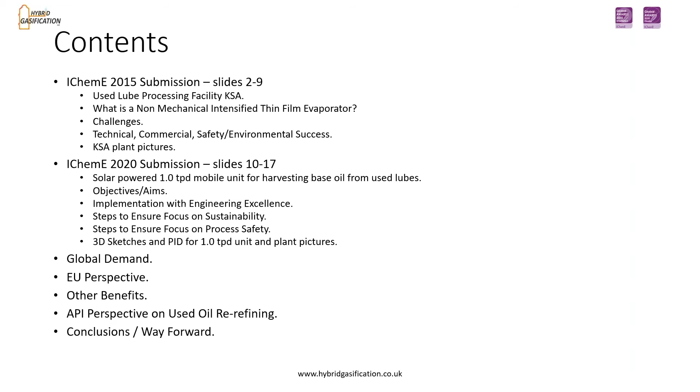I wasn't too sure, but my presentation consists of 9 slides, almost 8 slides on my previous submission in 2015, which was shortlisted. I will run through quickly just to put some perspective on where we went with the next stage of this 2020 submission, and I'm happy that it's also been shortlisted for presentation. And then I will go to some global demand for base oil, lube oil, and EU perspective on that, and in the end some conclusions.

The used lube oil processing facility, the first one, was built with a 100 ton per day capacity in Saudi Arabia to produce Group 1 heavy base oil. It was a vacuum distillation facility.

It actually used structured packing for separation of a consistent quality product. The interesting and novel part of that was that rather than using a conventional wiped thin film evaporator to treat the residue, a non-mechanical thin film device was fitted in the flash column, for which a patent has been filed.

I'll explain a little bit on what is a non-mechanical intensified thin film evaporator. It is a device fitted on the bottom of a flash column, and this helps to recover the remaining part of the base oil when the heated base oils enter into the flash column.

Amazingly, we were able to achieve more than 80% recovery without fitting the mechanical wiped thin film evaporator, the conventional approach normally used. We are all familiar, being process engineers working in the oil and gas sector, that the problems with mechanical thin film evaporators are always mechanical seal problems.

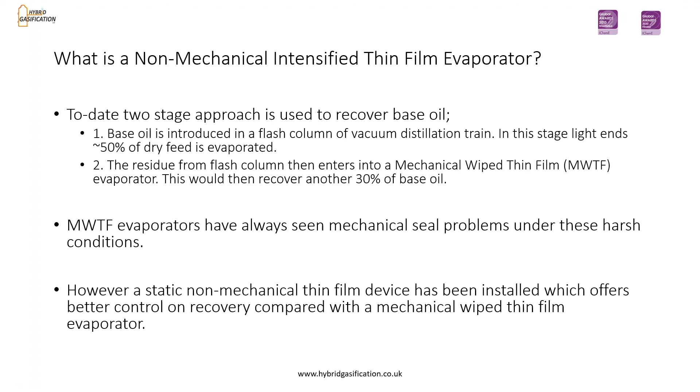The challenge was when this was proposed by me that this was a very inexpensive and practical solution, so the client wasn't ready to go for this unproven but very inexpensive, practical solution.

So we had to do some testing to convince the designer of the plant. In order to convince the designer, we ran a cold testing to establish the optimum flow rate for a consistent quality of thin film.

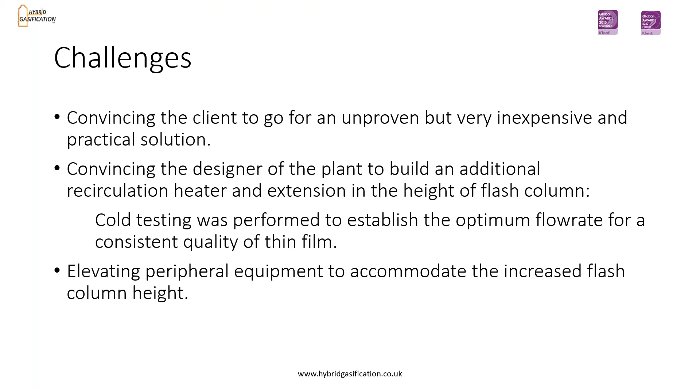For that, we needed to increase the length of the flash column, and in order to do that, we had to elevate the peripheral equipment to accommodate the increased flash column height. So after a few iterative discussions with the client, we got the go ahead, and we installed it.

In fact, it eliminated that problem. It performed very well, better than the thin film evaporator, with no downtime or shutdowns seen, which are typical with the wiped thin film evaporator. We saved on the additional vessel, pipework fitting, and all that. We saved on plant downtime, and therefore we built the plant much cheaper than without this additional system, which includes the wiped thin film evaporator.

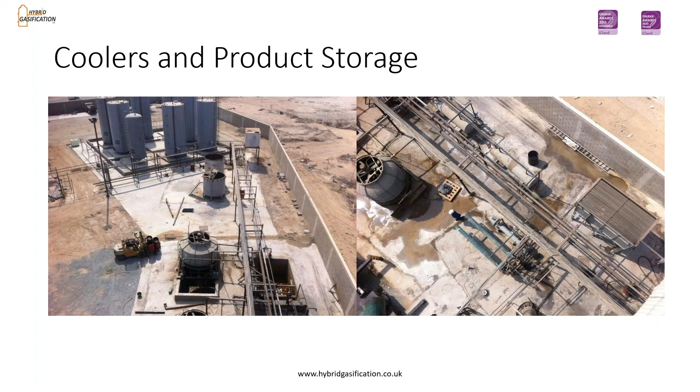You can see the residue here, as the spent lube oil is converted into heavy base oil and light base oil.

Now I come to my current submission, which is a 1 ton per day mobile unit for the recovery of base oil from used lube. The idea was that one could run it with solar powered energy, maybe for 6 to 8 hours, unless you want to run it for 24 hours, depending on the economics where it's installed.

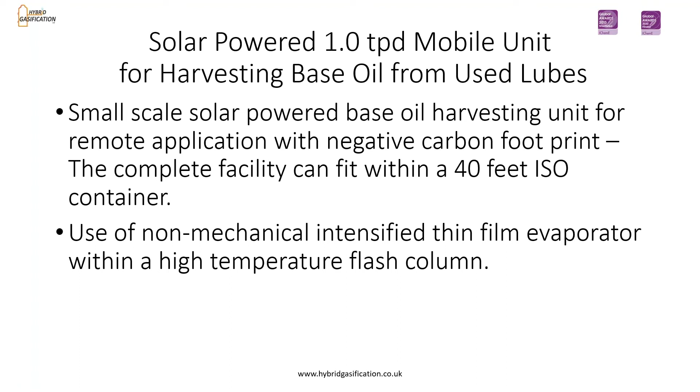It also has this non-mechanical intensified thin film evaporator fitted in it. Some of the objectives here were to improve the recovery and quality of product by avoiding adulteration from different types of oils when taken to the centralized facility.

Improved environmental benefit by avoiding the use of fossil derived energy, and last but not least, improved environmental benefit by avoiding unnecessary transportation to and from the centralized facility.

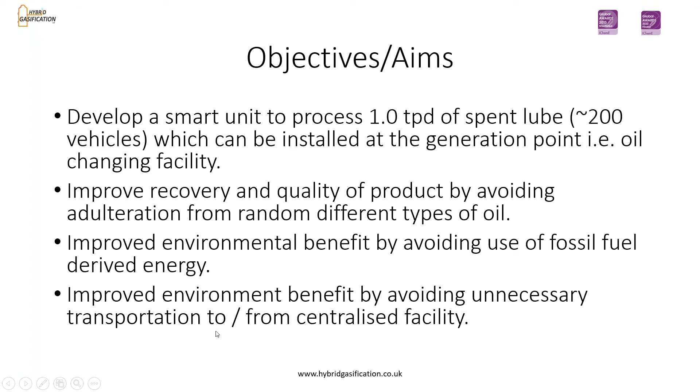There were a few challenges in building a small unit. One was downscaling from a 100 tons per day plant to 1 ton per day, and you can imagine the process engineers faced a lot of process engineering challenges. The recovery we could achieve was 85%.

Heating requirement was met by an electrical coil immersed in thermal oil. Use of solar power electricity offers an enhanced negative carbon footprint.

That also gave the benefit of sustainability, such as on-site recycling of base oil offering much lower cost than transporting to a centralized facility, helping with not-in-my-backyard community demands, and improved income for the local community.

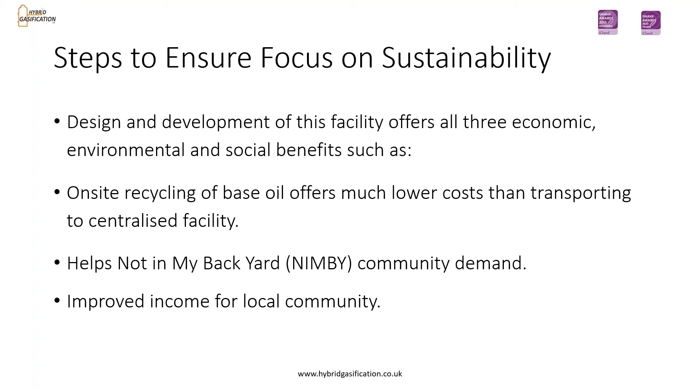Process safety wise, there were a few things we needed to look into. The process plant operates at full vacuum and all columns had pressure relief valves installed. All control valves were positioned ergonomically for safe operation. The thermal oil circuit was installed with a flame arrestor in case released fumes catch fire.

Exhaust gases post vacuum pump are released via a water seal to an enclosed flare system maintained at 850 centigrade. Here are some sketches, a 3D sketch of that small facility, 1 ton per day, with P&ID.

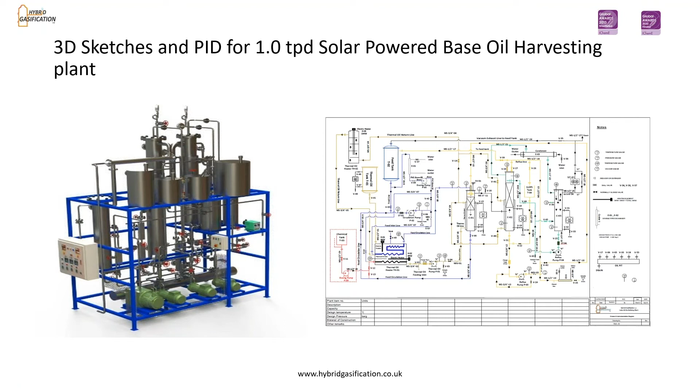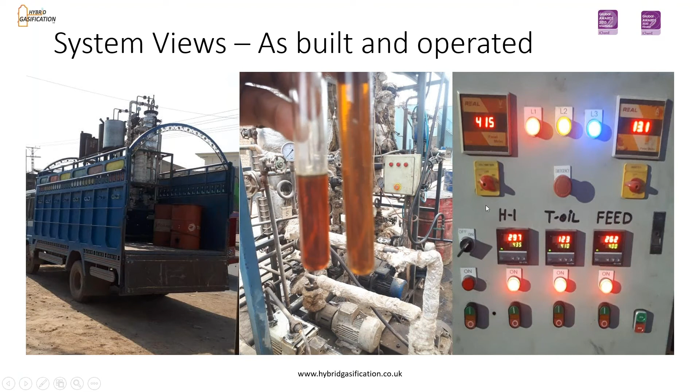In the middle of the picture, in the background, you can see the same demo facility in operation with base oil recovered, pictures of it in the tubes, and a control panel shown on the right side.

In summary, a 1 ton per day compact unit has been installed, achieving 85% recovery. Benefits of on-site recycling of base oil will result, and the complete processing unit easily fits in the space of a 40-foot container.

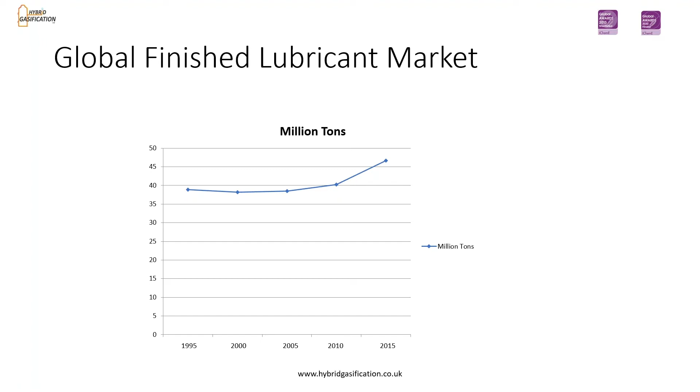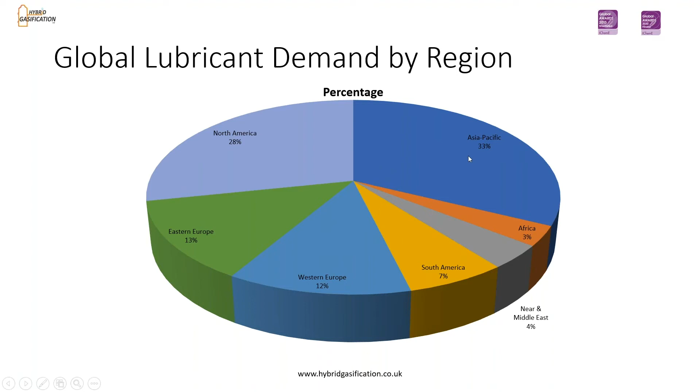For those who want a feel of the finished lubricant markets, it's of the order of 40 to 50 million tons per annum globally. Global demand, almost Europe, America and Asia Pacific, all share an equal percentage of demand.

Pakistan and India have almost a 1.7 million tons market. Globally, the review market by sector shows almost 50% in the commercial and consumer sector, which can be tapped into if this process is taken forward.

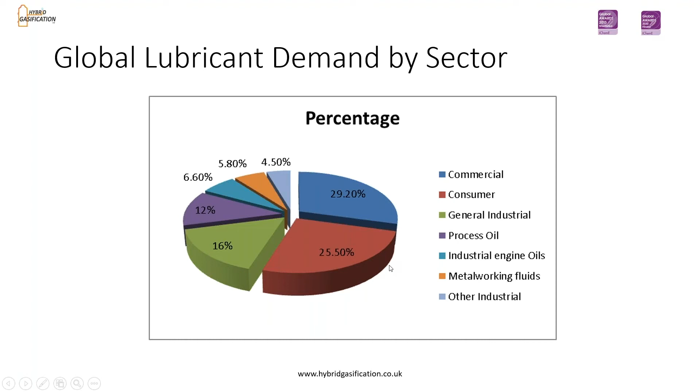There's an EU perspective I've added in my presentation. Out of 6 million tons sold annually, only 2 million tons are collected, and almost 1 million tons are re-refined.

Plants using hydrogenation or solvent extraction produce virgin quality oil, and a report by Fehrenbach confirms that recycling uses less energy than oil virgin produced from crude oil.

So an EU framework directive insists on preference for re-refining over fuel use. So we should really stop using it as a fuel, and used oil should be collected separately.

Benefits to the oil refining sector for this particular technology: re-refining offers an overall negative, good carbon footprint compared with oil produced from the crude oil route.

It keeps lube oil in productive use and delivers improved oil security. Non-mechanical thin film evaporation can be applied in several other areas of refining.

Immediate application is for recycling base oil in poorer countries where there is no need for group 2 oils, where the old cars are there and all that. But a hydrogenation stage can be added to obtain group 2 base oil. Potential use to clean scrubber effluent contaminants, and also on the biodiesel plant for methanol recovery. There are several more applications for this non-mechanical thin film evaporator within the petrochemical sector and refining sector.

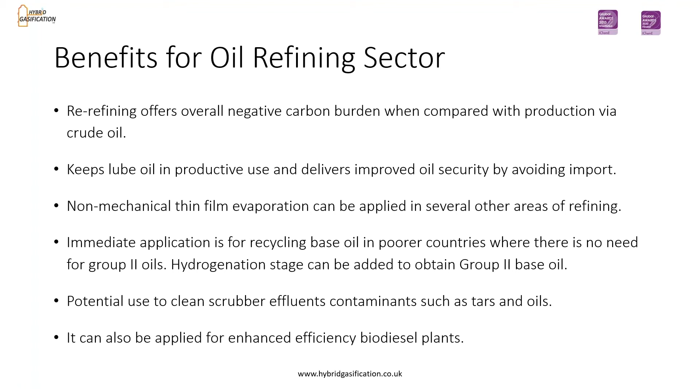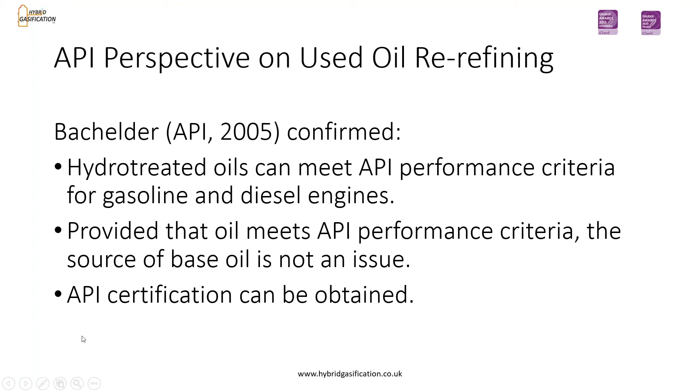I can go on, guys. There's an API perspective on used oil re-refining. I've got a couple of slides left where Bachelder confirmed that hydrotreated oils can meet API performance, provided that the oil meets API performance criteria. The source of base oil is not an issue, and one could get API certification for this type of plant.

My last slide is just: employing the 1 ton per day solar base oil recycling system has many economical and environmental benefits. The application of non-mechanical intensified thin film evaporation device is a leap forward in the reduction of processing costs and will replace conventional expensive evaporation technologies currently in use. So this was it for me today.

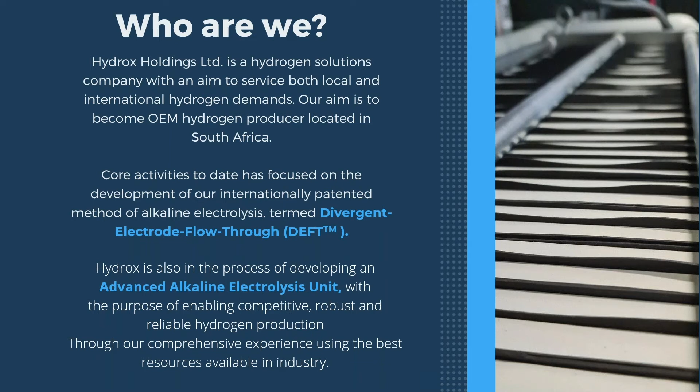In terms of our core research and development, our technology we've coined the term DEFT. It stands for Divergent Electrode Flow Through, and I'll give you a breakdown later on in my presentation of what that technology encompasses. Likewise, here locally in South Africa, in terms of positioning ourselves as a commercial fabricator, we've gotten considerable interest locally as an OEM solutions provider for hydrogen, and hence we are concurrently working on our advanced alkaline electrolysis technology as well. So that's a brief introduction of the two technologies that we are championing.

So what is the challenge when it comes to electrolytic hydrogen? Currently, around 95% of hydrogen produced globally is from fossil fuel sources, for example, steam methane reforming. A small amount, 5%, is produced from electrolytic hydrogen, and an even smaller percentage of that is green hydrogen. So what is the need for electrolysis to become successful?

In order for that to happen, electrolytic hydrogen needs to become more accessible and, more importantly, more affordable. And for that, you need electrolyzers to become inexpensive, reliable, compact, and to some extent have operational flexibility. Taking all this into consideration will do wonders for the CapEx and OpEx of these systems, as well as for their overall efficiency and reliability. Those are the core issues we're trying to tackle as a small organization. Moving on to the next slide. There we are. So what are the current challenges in industry?

So what you'd find is within industry, where you find efficient electrolyzers, they often do come in at quite a high capex and opex. So the operational costs aren't exactly reliable. So they do struggle to compete with the current fossil fuel sources of hydrogen available globally.

In terms of operational flexibility, there's this need to continue to design electrolyzers to be more coherent with being linked to renewable energy sources such as your solar and your wind. And currently, number 3 over there, one of the drawbacks with a lot of hydrogen systems is the complexity that's involved. And obviously, we have more components and more complex components.

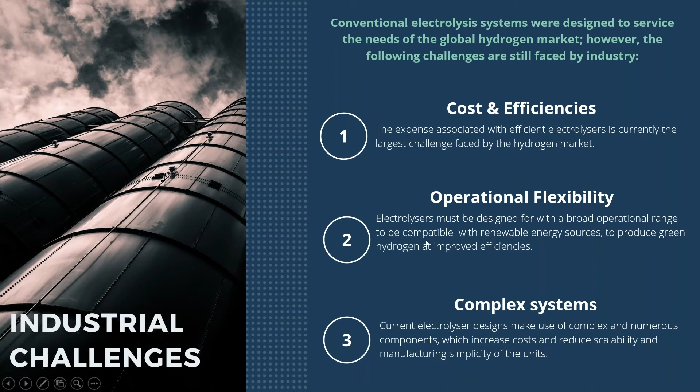So what do we have as Hydrox to bring to the table? So like I've mentioned, our core development is the divergent electrode flow through principle. And what's unique about it is it does not utilize a conventional membrane or diaphragm to achieve separation of the produced hydrogen and oxygen gases. So quite simply, we believe that the absence of the membrane will allow for operational flexibility as well as the improvement in the high capex costs associated with currently available conventional electrolyzers.

And in terms of our advanced alkaline electrolysis system that we're currently developing, it makes use of industry's best components, such as membrane separator components from AGFA, as well as electrodes sourced from De Nora. And the whole idea about that is to simplify and streamline the electrolyzer design while achieving a high efficiency. And again, the whole idea is for us to incorporate this technology as an OEM manufacturer here locally in South Africa. Moving on to the next slide.

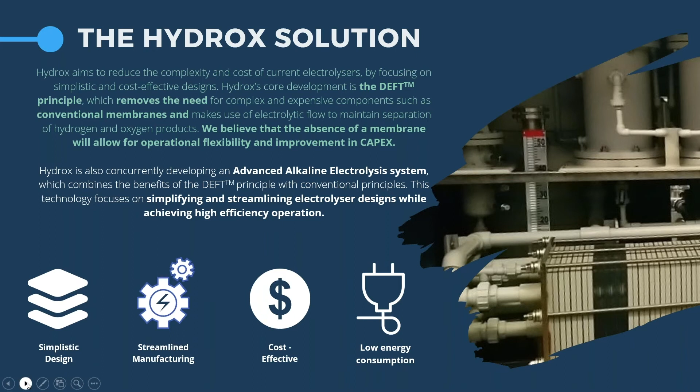All right. So just a bit of a breakdown in terms of what distinguishes the technologies. So our core technology, which is DEFT, as I've mentioned, doesn't make use of any kind of membrane to separate the oxygen and produced hydrogen gases. It solely relies on the flow of electrolytic solution through porous structures in order to maintain the gaseous separation. So as a result, there's a small electrode gap that's present inside the electrolyzer itself, but there is no conventional membrane or diaphragm.

And flow introduced into a cell provides you the unique advantage that you do not have to, to such an extent, concern yourself with too much ohmic resistance formed by the gas bubbles on the electrode surface, because they're actively removed from the cell all the time. So you have that benefit in terms of being able to now achieve very high current densities and not being limited by the current density threshold that you would normally have with an alkaline technology. And the whole idea with DEFT is to enable us to push the boundaries of current conventional electrolyzers. And on the next slide, I'll illustrate to what extent the technology can go about achieving that.

In regards to our advanced alkaline electrolysis technology, it's an advanced technology that aims to use a zero gap type operating principle, but the whole idea is we want to develop a reputable advanced electrolyzer that can be commercialized here locally, and that would be our current short-term route to achieving commercialization.

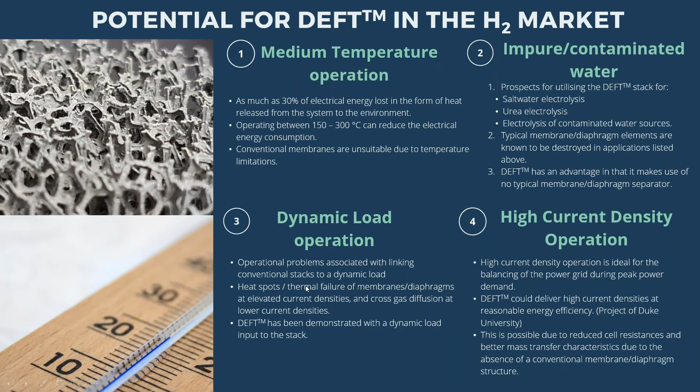Over time, we've done a number of concept demonstrations to go about developing our unique technology DEFT, and we've done this on a number of stack prototypes over time. And we've worked on this technology for the past 8 years, and it is currently ready to extend itself to potentials not recently realized by conventional electrolysis technologies. And this is really what we would like to explore in a number of partnerships that we're looking at the moment.

But just to summarize where we are with the technology, just waiting for the slides to catch up. I think it's caught up.

So on the left-hand side, we've recently done a demonstration of our technology for Shell, the Game Changer program located up in the Netherlands. The whole idea was to demonstrate our DEFT technology by producing a unit that can do 2.5 cubic meters of hydrogen per hour. So it roughly equates to a sizable demonstration stack in the range of 15 kilowatts, and that operates off our DEFT principle.

And as I've mentioned, concurrently, we're developing our advanced alkaline electrolysis technology, which utilizes a lot of the core elements that we've incorporated in our DEFT technology, alongside the AAE and utilizing the core elements. We're utilizing our own unique experience in order to design a very competitive unit here. Moving on to the next slide.

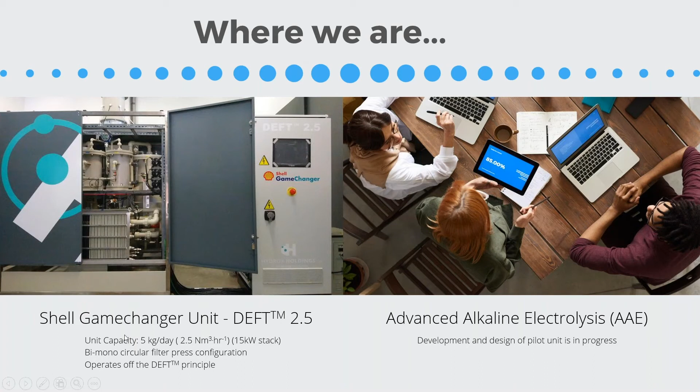So just to go briefly over what our Game Changer program was about. We were commissioned in June 2018 to undertake a project to do a demonstration. The project was subdivided into 3 phases. The technology had some challenges associated with it, which we had to overcome in phase 1, which graduated us over to phase 2, which was the engineering.

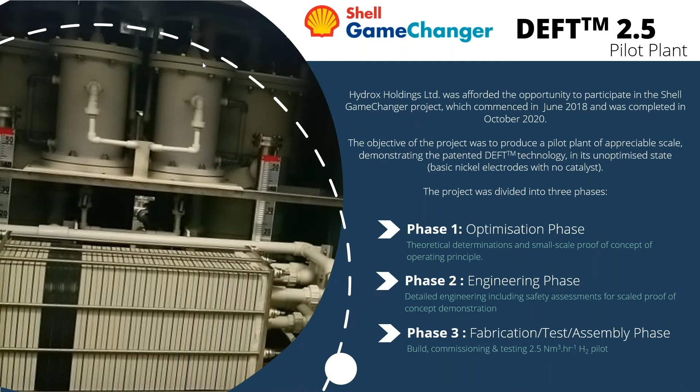So various different safety checks, HAZOP analysis in order to produce not only the stack itself, but the complete balance of plant, which we designed internally within Hydrox in order to facilitate a unique balance of plant to operate such a unique cell. And phase 3 was the phase where we went about fabricating, testing, and commissioning the unit. So that was our Shell Game Changer, and from Shell Game Changer there came a number of outcomes.

So the technology is still very much in a rudimentary form. There's still a lot of optimization that we can do since it is largely uncatalyzed at the moment, but it shows good potential in terms of getting to very reasonable efficiencies. With our Shell Game Changer project, we managed to demonstrate an efficiency range of roughly 64 to 68 kilowatt hours per kilogram of hydrogen. So on a high heating value, that translates into a percentage range of around 62 to about 58.

And we demonstrated the stack within a voltage range of 1.8 to 2.4 volts. A little bit higher than conventional alkaline electrolysis technology, but we aim to bring it into the region of 1.7 to 2 volts in the near future.

And regarding the combined capex and opex costs with an assumed electrical production cost of $0.07 per kilowatt hour, we calculated the end cost to produce hydrogen from our system at atmospheric pressure to be in the region of about $8.44 to $6.95 per kilogram, depending on where in the voltage range you operate. So we feel there's still significant potential to improve that cost range.

And in terms of gas purities, we had to achieve anything in the region of 99.5 volume percent and higher, which is great because we managed to achieve that with a membraneless principle, and we've demonstrated good gas purities, very similar to what you get from a conventional alkaline electrolyzer. And in terms of scale up, previously we started very small, but with our Game Changer unit, we're able to provide a demonstration in the region of 320 millimeters in size.

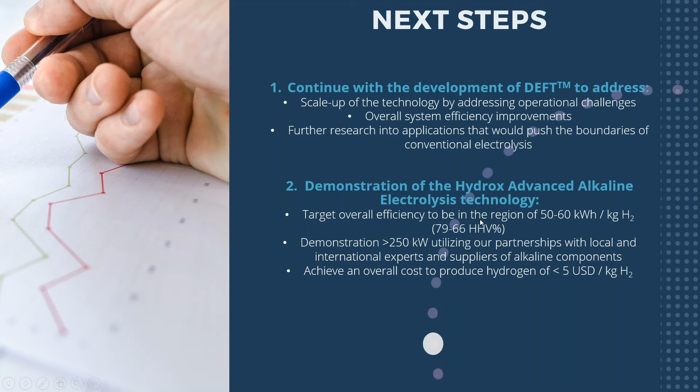And the goals that we have over there for the technology, we feel are very achievable. So we would like to get efficiencies into the region of 79 to 66% on the high heating value. And we'd like to do a demonstration roughly in the region of about 250 kilowatts. And inevitably, we would like to prove and show that we can bring the cost to produce hydrogen below $5 per kilogram. So that pretty much concludes my presentation.

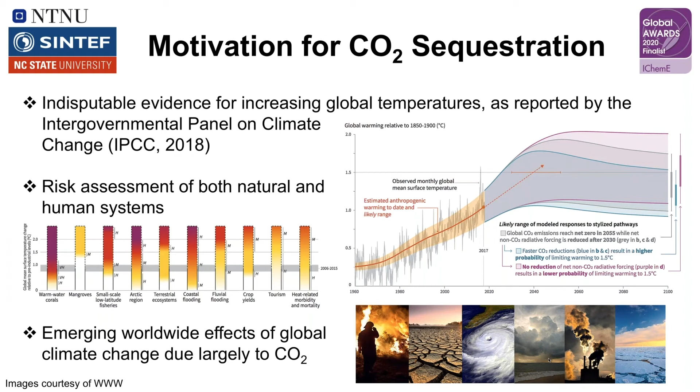What are the approaches? There are a variety of different ways in which one can remove CO2 from mixed gases. One of the most common ones involves CO2-philic solvents. And these can be aqueous or non-aqueous amines, but they rely on one important characteristic, and that is high CO2 solubility. Unfortunately, these types of liquids can also be toxic, corrosive, etc.

Then we could talk about inorganic membranes, where we deal with designing materials that are typically nanoporous, and we work with size selectivity and adsorption. Problems, of course, they're fragile. They can be tailored, but they tend to be expensive. Organic membranes, well, they can be size selective or solubility selective, and they tend to be much more mechanically robust. They're tunable in terms of properties, and most importantly, they're scalable.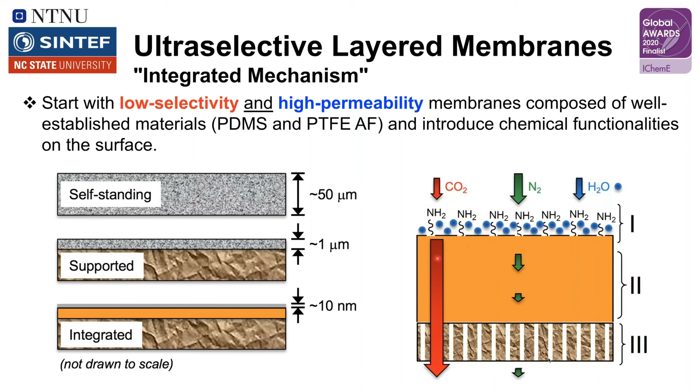This coating is only about 10 nanometers thick. Along the surface, we have species that are highly hydrophilic and highly CO2-philic—amines, which I mentioned earlier, are perfectly suited for this. Water stays within this range and allows us to take CO2 at one concentration and build it up, so when it goes through the high permeability zone, it's much more concentrated, and this is what we remove.

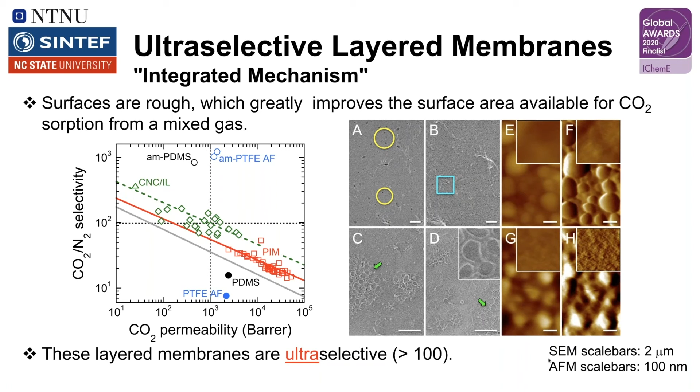I included this graph at the end to show once again where our ultra-selective membranes are located. We actually get into the Goldilocks range, where we have high permeability and high selectivity. On that note, thank you very much for your attention.

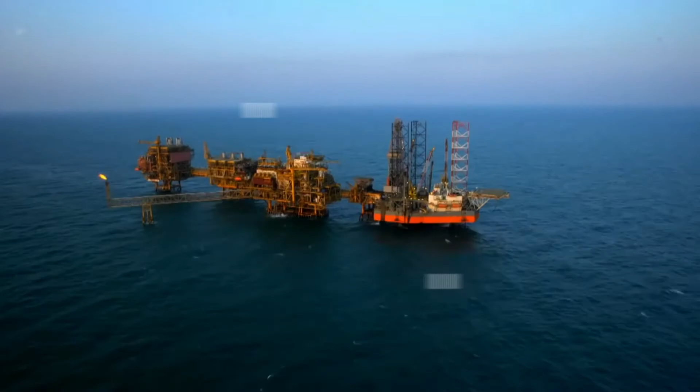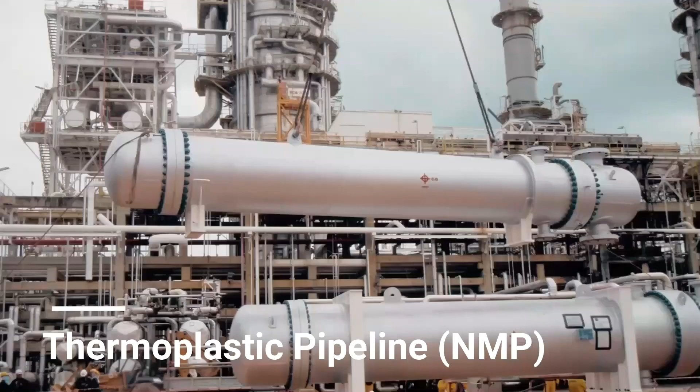Even though self-healing technology has been developed for many years, commercialization still remains a challenge due to the expensive catalyst. Our breakthrough innovation replaces rare earth-based materials with metal organic frameworks, which are more sustainable and economical, allowing upscaling and commercialization. The partnership between Petronas, Deakin University and University of Adelaide proves successful collaboration between industry and academics to take this technology further.

We all know that infrastructure in the oil and gas industry is very costly to maintain and keep safe for workers. We believe there's an opportunity to use self-healing materials to extend service life, lower maintenance costs, while enhancing user safety.

The technology we've developed with Petronas and the University of Adelaide addresses the long-standing problem of latency in self-healing materials. Using traditional microencapsulation techniques and a new application for metal organic frameworks, we've greatly increased latency and durability while achieving high levels of healing by eliminating surface defects, maintaining the integrity of the coating and preventing corrosion.

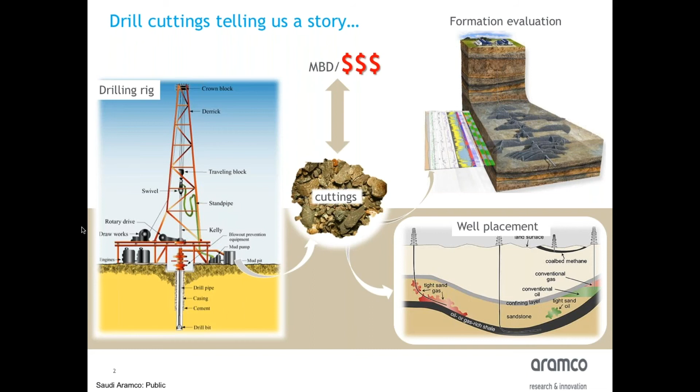However, the key challenge to maximize the value of cuttings for real-time formation evaluation is the accurate determination of the cutting's depth. Unfortunately, mud logging deployment has historically suffered from limited application due to uncertainties in drill cutting depth determination that can reach plus minus 15 feet, as you can see.

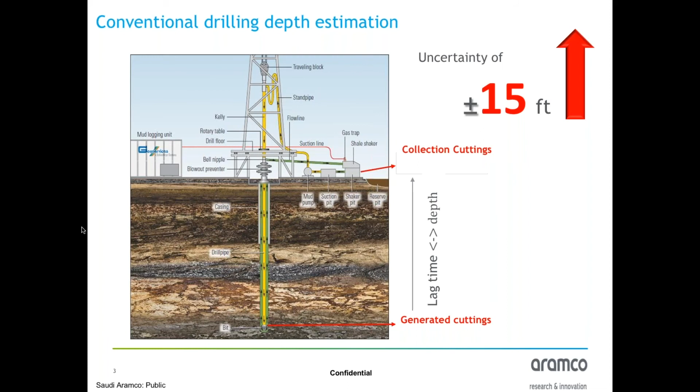This is already huge, and this uncertainty can be caused by many factors such as hole caving, hydraulics, gravitational debris accumulations, and many other reasons. Of course, these huge uncertainties lead to a lack of proper reservoir characterization and formation evaluation.

As chemical engineers working for an oil and gas company, we developed a technology called nanotags. This nanotag technology works to tag the drilling cuttings precisely as they are made at the drill bit face.

They are generated at the drill bit with barcoded nanotags that are injected into the drilling fluid. These nanotags are injected in certain sequences and concentrations with the drilling fluids and travel to label the drill cuttings. The labeled drill cuttings are then collected from the shale shaker, as you see here.

This technology can reduce the uncertainty to plus minus 1 foot. The generated cuttings will be permanently labeled based on their depth of origin without affecting any of their properties.

The synthesis of the nanoparticles via low surfactant loading or surfactant-free emulsion polymerization is very simple, scalable, and cheap, both in a small batch as well as in the large scale state-of-the-art flow reactor.

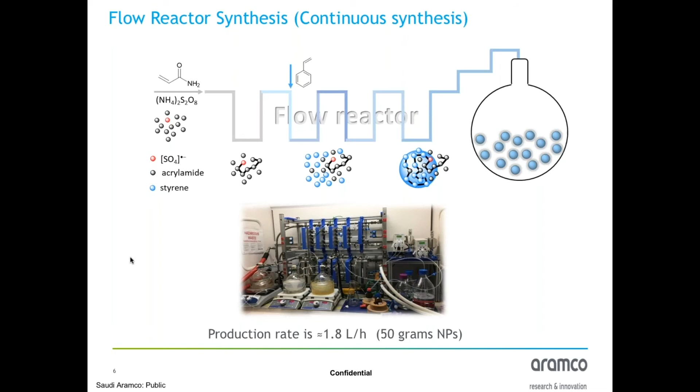The innovative nanotags are designed to be compatible with water-based drilling fluid via addition of hydrophilic comonomers or ionic surfactant. This compatibility can be further adjusted via reverse emulsion for use in oil-based drilling fluid as well. Worth mentioning, the hybrid nanotag synthesis process uses very safe microreactors, and the whole process was optimized for safe operation.

We designed a unique drilling depth correlation system consisting of the nanotags that you see in the containers here, and the automated injection system, as well as the detection and separation workflow.

The nanotags are transported to the field in low concentration aqueous suspension, only about 1% concentration, so very diluted, and used at ppm concentration. Here we are talking only about 5 and 10 ppm concentration of this material introduced to the huge mud tanks at the rig site.

The injection system will add the nanotags at certain pulses and concentrations before the low pressure point in the mud line, and operates under explosion-proof conditions to prevent any interruption to the drilling operation.

So we can do this kind of tagging for the drilling depth precisely without interrupting the drillers or the drilling operation. The cuttings were tagged as they were drilled at the drill bit and then collected off the shale shaker. After that, the collected cuttings are exposed to a solvent extraction and thermal separation workflow to extract the nanotags from the cuttings in the lab for estimation of arrival times.

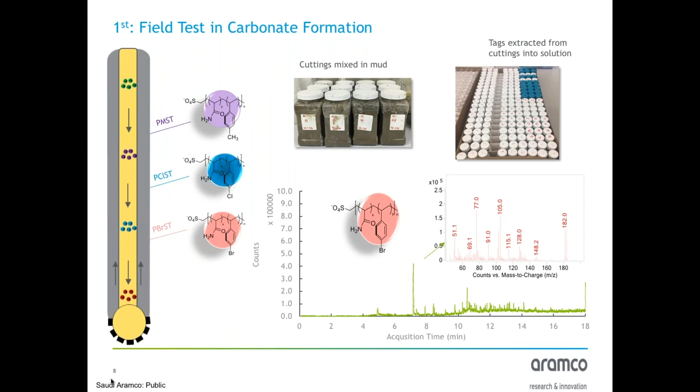To sum up, barcodable polymeric nanoparticles designed as tags for drill cuttings were synthesized and tested in the lab. A drilling field test confirmed the compatibility of the nanotags to determine the exact depth of origin of the drill cuttings in real time. And the impact of this is that the nanotags approach has potential to be a game changer in the oil industry, allowing accurate and precise cutting depth determination for real-time characterization from the cuttings. Analysis of the drill cuttings allows us to measure the properties of the underground rocks and evaluate the fluid content, and to improve reservoir management practices.

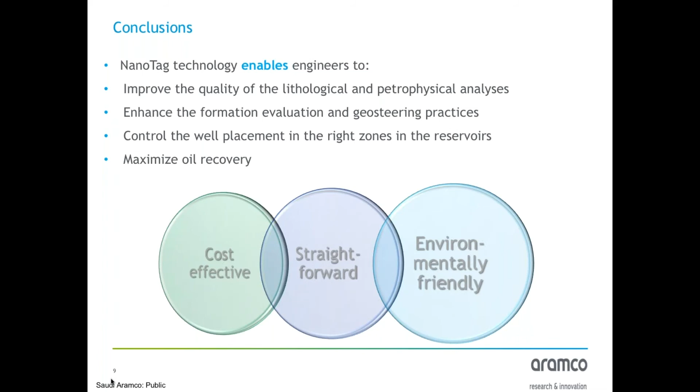Our first question is, can you please elaborate on the process you use to adjust the nanoparticles when drilling in water? And when in an oil environment, what is the best favored environment for maximum production? I'm sorry, would you please elaborate which process you mean, like the injection process or the detection process or the overall process? The question reads, can you elaborate on the process you use to adjust the nanoparticles when drilling in water? That's the first part. And then the second part, when in an oil environment, what is the best favored environment for maximum production?

So this technology has been developed for drilling oil wells, not water wells. So oil and gas, basically hydrocarbon wells. And we tested them in one of the gas wells as well. So I'm not quite sure if that will be relevant to drilling a water well. But what is important for this technology is that when you drill in a reservoir, regardless if it's oil or gas, it will be really important to know from which depth the drill cuttings came.

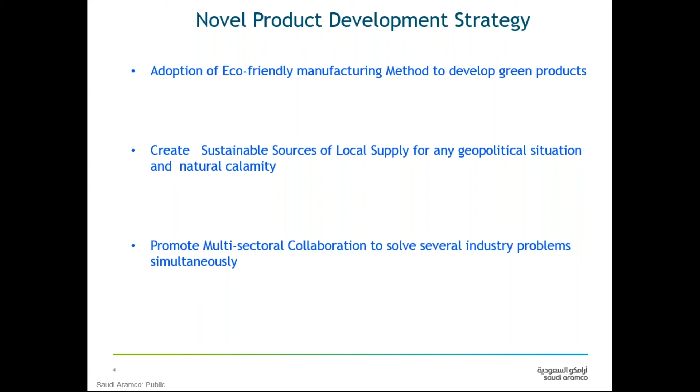And it will create a sustainable source of supply for the kingdom, so that in any geopolitical situation or natural calamity, as for example now due to COVID, we are unable to import lots of these materials. Now, if we develop it locally, we'll be able to avoid this type of problem in future.

First, I will talk about the date palm industry waste that we used to develop a couple of products. These are called conventional LCM products, loss circulation materials. As you can see, from a date tree there are various components. We used all the components of waste date trees to develop three major products that have been used by the industry for the last 100 years. And we have been importing these products since the start of oil and gas exploration. Now, we developed these products locally using this waste material.

First, we used the date seed. That is, after eating the date fruits, the seed comes as a waste material. In this country, we generate a huge amount of date seeds, more than 250,000 tons per year, and nobody knows what to do with it. So our objective was to solve the disposal problem of the date palm industry and create a value-added product for the oil and gas industry. And that's why using the date seed, we developed a product that we call ARC Plug. It is a particulate loss circulation material.

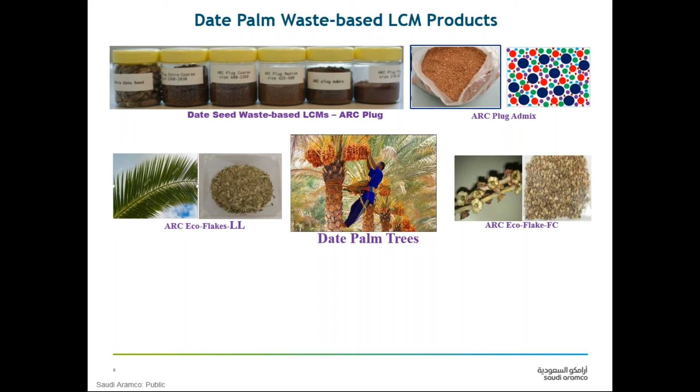Then, secondly, we used the leaflets and the fruit caps coming from the date fruits after eating them, the leaflets coming as pruning waste. We used this material to develop another product for controlling loss of circulation while drilling, called flaky LCM, flake type LCM. So particulate, flaky, and fibrous: these three loss circulation materials are the major ones used by the industry since the start of exploration and exploitation of oil and gas resources.

Finally, we used the diseased date trees, the roots, trunk, everything of the diseased date trees, to develop a fibrous loss circulation material. We call it Eco Fiber because it is natural, it is organic, it has no detrimental impact on the surrounding environment. That's why all these three products are eco-friendly products. So there will be no environmental impact if we use them onshore, offshore, in lagoon areas, in lake areas, whatever.

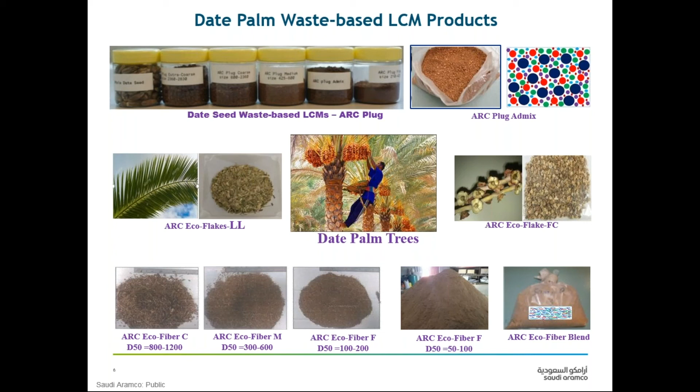Now, the three products we have developed: one is ARC Plug. This is particulate lost circulation material. Another is ARC Eco Fiber. This is fiber lost circulation material. Another is ARC Eco Flakes. This is flaky lost circulation material.

As I told before, these three major classes of lost circulation material have been used by the industry since the start of oil and gas exploration, we are using them now, and probably will be using them until the oil is finished. So this ARC Plug, all commercially available products currently in the market can be replaced by using our ARC Plug, which we developed using date seed.

This ARC Eco Fiber can replace all fibrous products available in the market and marketed by various companies under different trade names. And the ARC Eco Flakes can be used to replace all flaky LCM currently in the market. The two products, ARC Plug and ARC Eco Fiber, are already commercialized by Aramco, and are now used by Aramco, and we stopped importing the products that we imported before.

The ARC Eco Flakes is in the pipeline; we are trying to form a spin-off company or find a partner for commercialization and business development. The second product we have developed using waste scrap tires. There are lots of scrap tires available in the Kingdom, scattered in the desert areas and everywhere, and nobody knows what to do. So we tried to develop a product using this material.

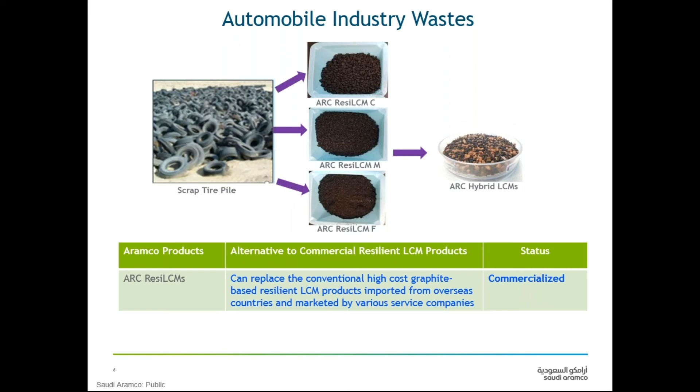The final products that we developed are some eco-friendly lubricants. As you know, most of the lubricants currently used in the industry are diesel or mineral oil based or their derivatives. And these are not good for the environment. They can cause damage to the offshore, onshore, or marsh and lagoon areas, and kill other resources. So when we explore and exploit oil and gas resources, if we damage other resources, that is not good.

And nowadays, different local, federal, and state governments are increasingly enacting environmental rules and regulations, and we are restricted from using mineral oil based or diesel oil based products. So we need eco-friendly alternatives. So using waste vegetable oil, we have developed some eco-friendly lubricants and emulsifiers.

Now, why do we use waste vegetable oil? Because this is a waste product. There is no other use for it in the food and catering industry. But if we use fresh vegetable oil, we will be taking a big chunk of the oil from the consumer market, and that may have a negative impact on the consumer market.

That's why we switched to waste vegetable oil, which will solve the disposal problem of the food and catering industry, and will solve our problem: the non-eco-friendly mineral or diesel oil based lubricants we can replace by developing eco-friendly lubricants using waste vegetable oil.

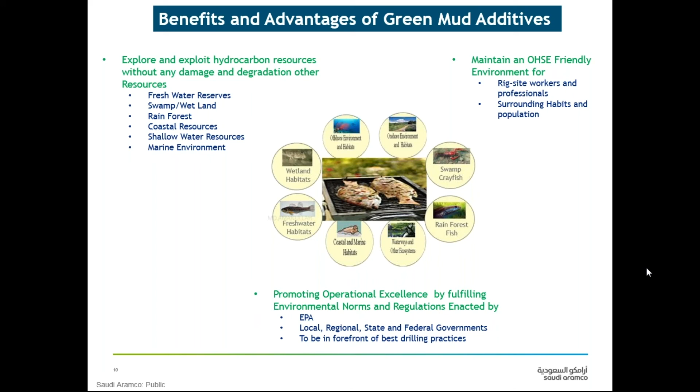Another is the EPA. The Environmental Protection Agency is nowadays enacting increasingly strict rules and regulations so that we are not damaging the environment. And that's why we have to fulfill their norms and standards. This eco-friendly product will allow us to fulfill the environmental norms and standards, to be in the forefront of best drilling practices.

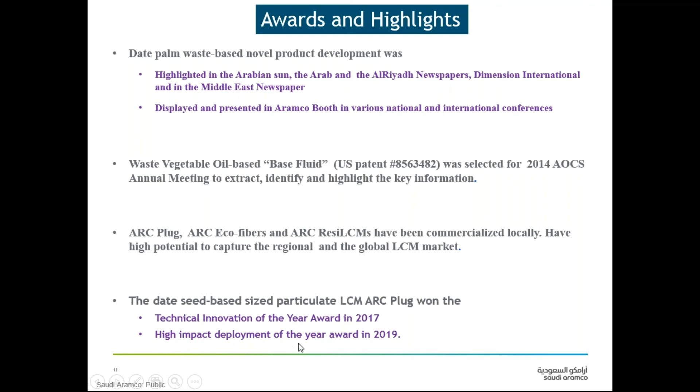Arc plug, arc ecofibers, and arc resi-LCM have been commercialized locally, and they have the potential to capture the regional and the global market. And the date seed-based sized particulate LCM arc plug won the Technical Innovation of the Year Award in 2017, and High Impact Deployment of the Year Award in 2019.

And finally, I cordially acknowledge the contribution made by colleagues and the technicians and the support from management for this research, and thank the IChemE award committee members for selecting our research and development as one of the finalists. And that is the end of my talk. If you have any questions, please.

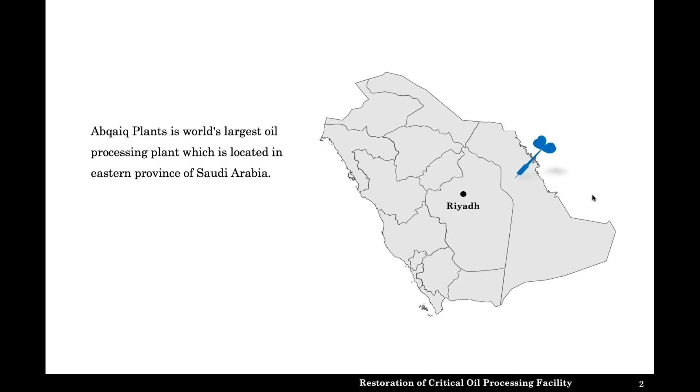Let me begin by telling you a little bit about the hydrocarbon processing facility that is Abqaiq plant. The facility is located in the eastern province of Saudi Arabia and processes up to 6 million barrels per day, amounting to approximately 5% of global oil production and making it the largest oil processing plant in the world.

The facility has a long history starting soon after oil discovery in the Abqaiq area of the eastern region of Saudi Arabia in the 1940s. Over the decades since, the facility has grown organically and includes the degassing and stabilization of 3 different grades of crude oil, NGL production, as well as steam and power generation for facility self-sufficiency and exports.

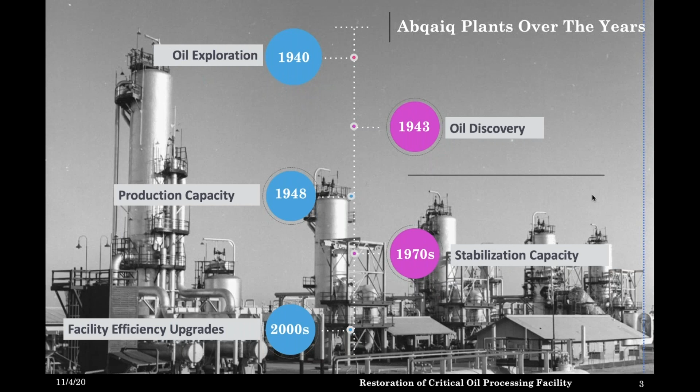As I'm sure many of you will be aware, in the early hours of September 14, 2019, the facility came under fierce and unprecedented attack by aerial drones, directly impacting over 15 critical pieces of equipment, creating raging fire across the whole facility, and shutting down 5% of global oil production. Here, I would like to play a brief clip just to give you a taste of the intensity, ferocity, and resulting destruction.

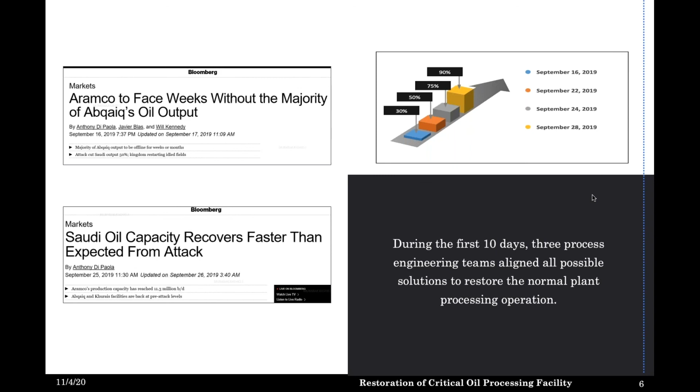Gentlemen, based on the devastation caused, most commentators, including Bloomberg, expected months of disruption, but the reality was that production capability was restored in less than 2 weeks, and then sustainably maintained by 3 separate teams working around the clock to carry out the hard task of figuring out how on-spec products could be produced through the crippled infrastructure of the facility. This rapid restoration was carried out by prioritizing immediate recovery solutions to commence production, followed by efforts to ensure that the recovery was sustained and to ensure the specified crude grades can be supplied to our customers.

Gentlemen, the prompt recovery was done for 10 stabilization columns that were impacted by the attack, including associated utilities and adjacent pipe racks. Over 25 procedures were developed to safely isolate, repair, segregate, and start up individual equipment after rigorous hydraulic analysis and relief adequacy check.

9 of the 11 degassing tanks were directly impacted. To commence maximized production, several of the tanks were patch repaired. This entailed a detailed risk assessment to operate the tank with derated design condition and the introduction of additional layers of protection. Furthermore, a new operating regime was created with upstream facilities to maximize degassing upstream and allow higher liquid rates to be processed at Abqaiq. This global optimization allowed over 20% increase in the oil processing throughput, while ensuring a careful balance was maintained to ensure maximal degassing upstream while ensuring no flaring taking place.

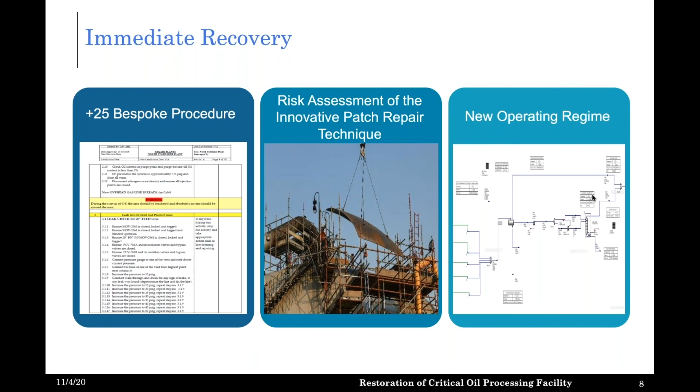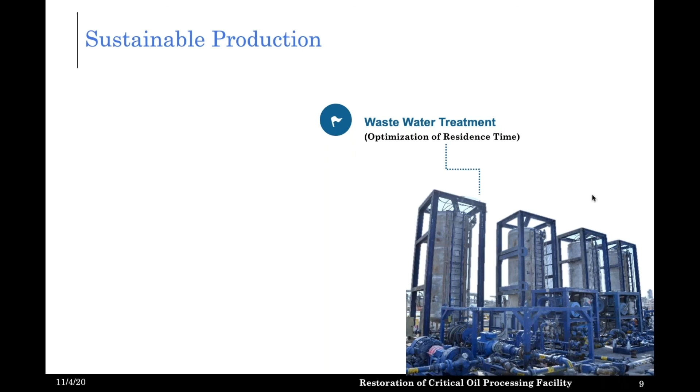Another area directly impacted was the wastewater treatment area. In order to ensure treated water quality was maintained prior to disposal, residence time was optimized by utilizing alternative storage volume following a detailed risk assessment.

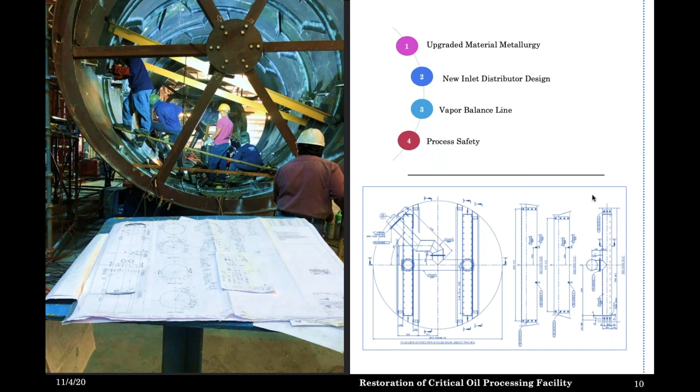The damaged columns were repaired rather than replaced by removal to fabrication shops in order to reduce wastage as well as time for repair. A core value throughout the restoration was to embed sustainability, safety, and enhanced resilience into the design, and the column repairs were utilized to upgrade metallurgy, install a new feed distributor for increased reactive area utilization, installation of vapor balancing lines for improved thermosiphon stability, as well as enhancing process safety by making the column suitable for vacuum design condition. These enhancements have all yielded a reduction in the facility energy intensity by 0.3%.

Gentlemen, a total of 58 design packages were developed, reviewed, and tracked through an optimized MOC process to achieve this rapid restoration, including multiple risk assessments, and this task was carried out by over 20 process engineers working around the clock. The fruit of these endeavors was the restoration of crude oil production of up to 6 million barrels per day in an accelerated but sustainable and gradual manner, defying expectation and providing stability to the oil market as well as wider industrial society, which is dependent on the availability of hydrocarbon fuels. The real success story was that this was achieved without any process safety incident, loss of primary containment, fires, or environmental impact.

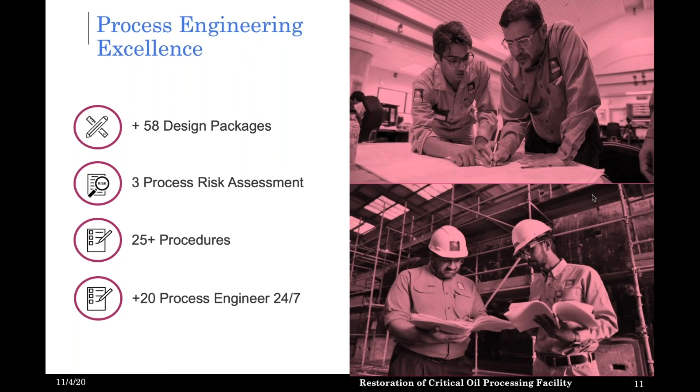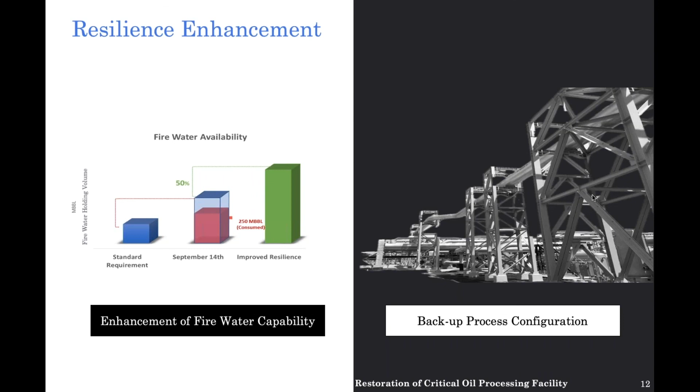This was an unprecedented attack that any processing facility has had to face in recent times, and the quick restoration of oil production and processing is a testament to the commitment, competency, and creativity of process engineers who were at the forefront of tackling the aftermath of this incident. This incident really showcased the importance of capable plant process engineers and their role in providing real, sustainable solutions when the chips are down, and it really is a prescient time with the world dealing with COVID-19 for all of us to be reminded of that.

This was on the ground, frontline process engineering excellence, which made a significant and immediate difference on a global scale. This was my presentation, and thank you for listening.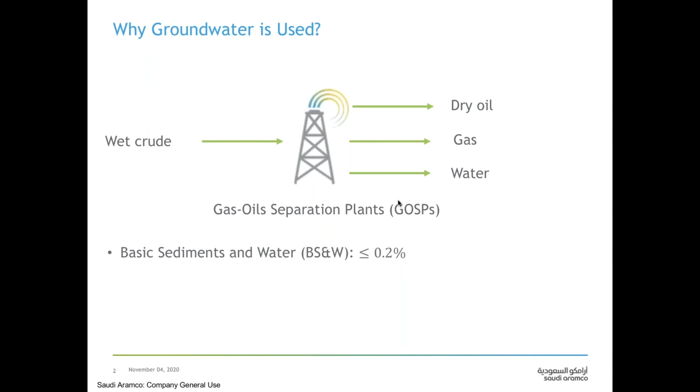But before we go any further, I would like to ask each one of you a question. Do you know why groundwater is used in our production in the first place? Well, this is because of the oil required specifications prior to exportation or refining. When oil is first extracted, it gets processed at the numerous gas oil separation plants, or GOSPs, across our country. These GOSPs receive wet crude oil and separate it into three main categories: water, gas, and dry oil. At these GOSPs, we ensure that the dry oil meets two main specifications. The first one concerns the water content in oil, also known as basic sediments and water. The water content has to be less than 0.2% by volume, and this is achieved by techniques such as injecting some chemicals. The second required specification, which is the one relevant to our topic today, is the salt content in dry crude. Salt content has to be less than 10 pounds of salt per 1,000 barrels. Oftentimes, this is achieved by washing the crude with groundwater, a process known as desalting.

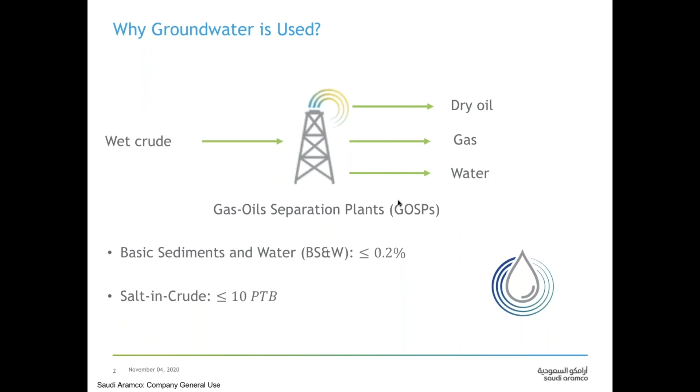To give you a more clear and detailed picture, let me share with you a simplified schematic of the GOSP process. Once oil is extracted, it comes with associated gas, water, and other contaminants such as salt. At our GOSPs, the crude oil is processed and separated as follows. The crude enters the high pressure production trap, a three-phase separator where oil, gas, and water are separated by gravity. Let's focus on the oil path for now. The oil then flows to the low pressure production trap. This is a two-phase separator where the oil and heavier gases are separated. Then the crude is pumped.

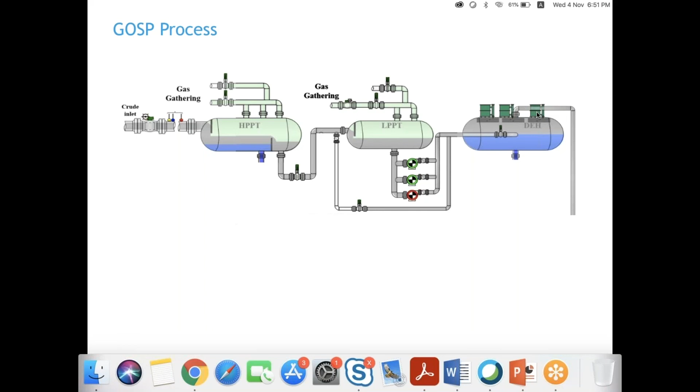At this stage, the oil is dry already, but it passes to the desalter to remove the wash water. Now, where does this wash water come from? It is groundwater that's mixed with oil before entering the desalter. This is done in order to dilute the high salinity residual water in oil.

The water separated from the vessels is sent to the water oil separator, where the produced water is de-oiled before it's injected back to the reservoir.

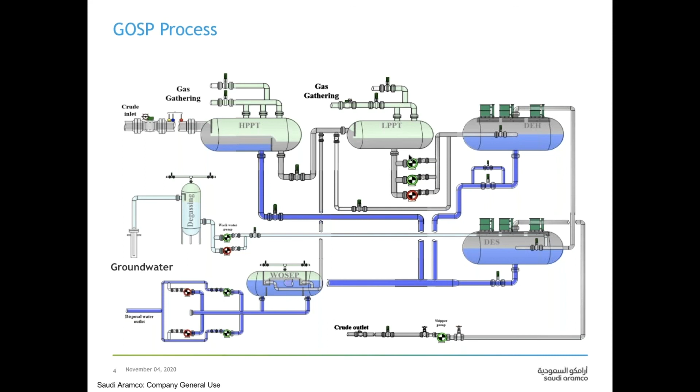And here, ladies and gentlemen, is where we identified an improvement opportunity. The idea is to use the produced water instead of groundwater to wash the desalted oil.

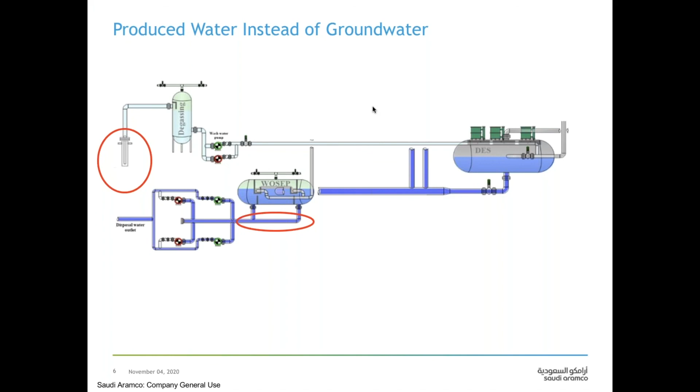But can this be done immediately, or are there some challenges? Well, as a matter of fact, the produced water cannot be used immediately because there are some parameters that must be met first. First of all, the total dissolved solids, or TDS, must meet certain specifications, and it's very high in the produced water, making it incapable of washing oil.

Also, although the produced water is de-oiled in the WOSEP, as we have seen, it still contains some fractional amount of oil. This oil is not necessarily processed, and therefore it could affect the quality of our produced oil. Last but not least, the produced water is sour and contains H2S, which adds complication. These challenges prevent us from using the produced water to wash oil.

Unfortunately, the technologies we used in the past had some limitations. However, earlier this year, we implemented the VACOM technology, which helped us overcome these challenges. Let's have a closer look at it.

So the technology uses vapor compression crystallization water treatment designed to treat the produced water. The VACOM technology, as you can see, takes produced water and treats it. We use this treated water to wash our crude oil instead of groundwater.

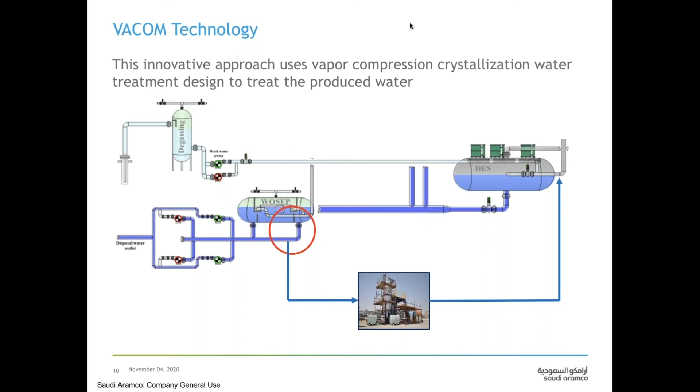And by using this approach, we were able to find an effective alternative to groundwater. The challenges that have been highlighted earlier were overcome as the TDS values after using the VACOM technology were acceptable. In addition, the oil presence was no problem as no foaming was observed from the sight glass of the VACOM vessel. Also, the injected chemicals were able to resolve all H2S issues.

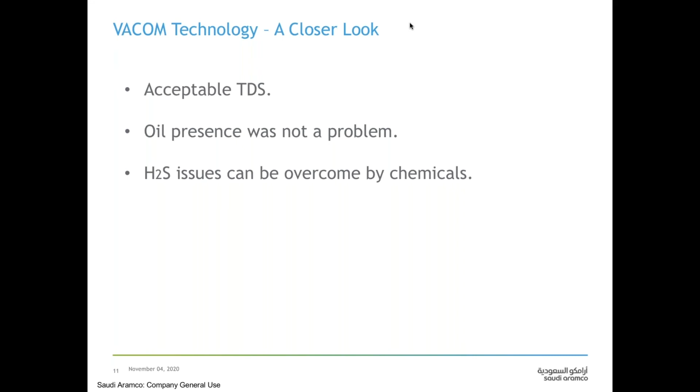So again, by using this approach, we find an effective alternative to groundwater to produce high-quality hydrocarbons and save the groundwater for future generations and other sectors such as agriculture.

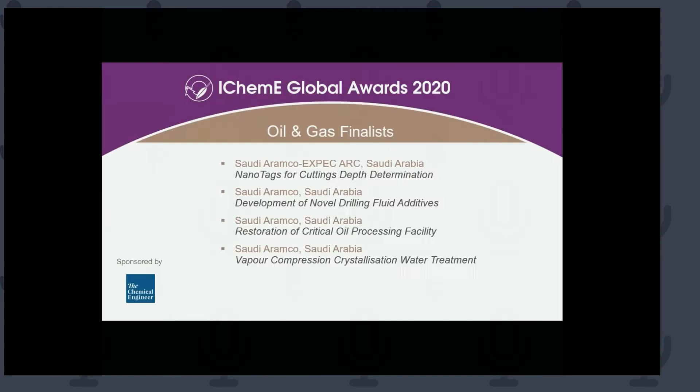And it's time for what we have all been waiting for, to find out the winner of the IChemE 2020 Oil and Gas Award. So let's begin with our highly commended entries, and they are from Hydrox Holdings and Saudi Aramco EXPEC ARC. Well done to everybody associated with those entries.

But now for the winner. Ladies and gentlemen, the winner of the IChemE 2020 Oil and Gas Award, sponsored by The Chemical Engineer, is Saudi Aramco and its restoration of its critical oil processing facility. So congratulations to everybody associated with that project.